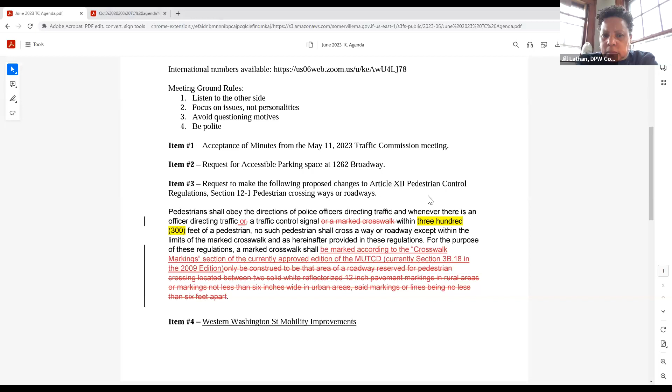Moving on to item number 3. Request to make the following proposed changes to Article 12, pedestrian control regulations, section 12-1, pedestrian crossing ways or roadways. Pedestrians shall obey the directions of police officers directing traffic, and whenever there is an officer directing traffic or a traffic control signal within 300 feet of a pedestrian, no such pedestrian shall cross a way or roadway except within the limits of the marked crosswalk. As hereafter provided, for the purposes of these regulations, a marked crosswalk shall be marked according to the crosswalk marking section of the currently approved edition of the MUTCD, currently section 3B-18 in the 2009 edition.

Who is here to discuss this item? Good evening, Commissioners. This is Brian Postlewaite, Director of the Engineering Division, representing our traffic engineer, Jessica Bello, who worked with me to develop this language based on a successful appeal conducted earlier this year. We discussed this at our last meeting, and you had requested to table it for the month, but you also requested that we develop a traffic signal plan of the city with buffer areas for 150 feet and 300 feet around each signal, which we provided earlier this week. As I recall, the main question from last week's meeting was whether we should change the 300-foot dimension to 150 feet based on requests from the public. Yes, thank you. Discussion on this item.

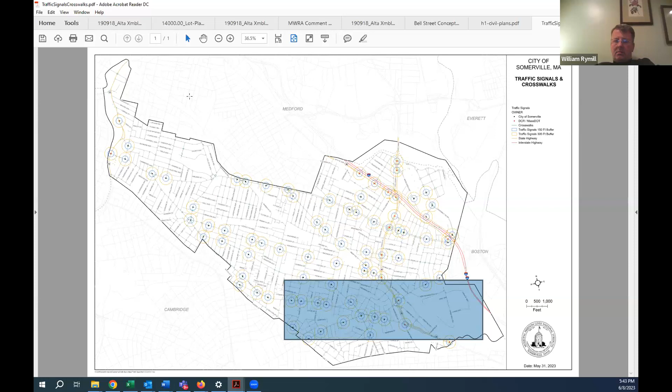Could you try Washington and New Washington? Yes. Only because in the past I've had complaints about the crosswalk area there. I am befuddled why it's not letting me just zoom in comfortably. There we go.

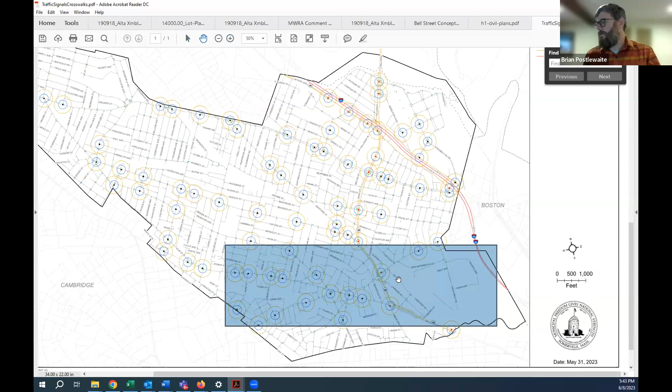So New Washington and Washington doesn't have a signal at that location. But if you were to take — this is a driveway signal for Clarendon Hills driveway, if I recall correctly — but up here where Innerbelt intersects with Washington is a traffic signal. Right, we use that as well.

As I recall the conversation last time, the question was whether 300 feet, or reducing it to 150 feet, would substantially improve or reduce the distance a pedestrian has to walk to get to a legal place to cross the street at a crosswalk, or get outside of that distance to find a safe place to cross without a crosswalk.

Our professional perspective is that 150 feet is the minimum, but that 150 feet would be an acceptable dimension. It is just greater than the standard stopping sight distance in the city, based on a 25 mile per hour speed. At a 20 mile per hour speed, it's smaller than that.

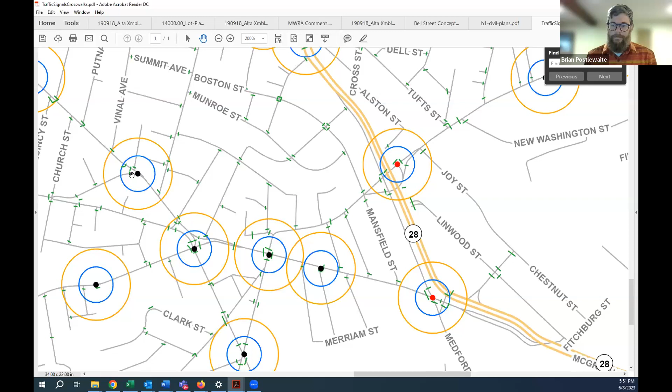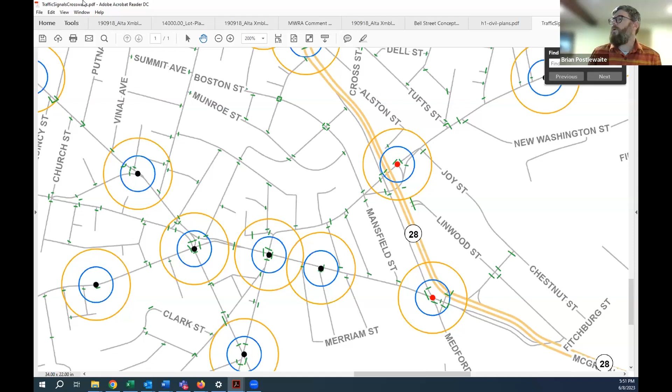Okay. I hope everybody can see that. Unfortunately, I don't know how to zoom in. Well, before I spend the time figuring out if I can zoom in, can everyone read that, or is this too small? I can see it.

So right now, this is the currently proposed language that is up for a vote. You've moved and seconded it, so you're in the discussion phase on this item. Right now it currently has 300 feet as the dimension.

Any one of you right now can vote to amend this section or any other section in this motion. You would vote on it. So the way you would change it to 150 feet is somebody would move to amend this item to be 150 feet, somebody would second it, you would vote on that amendment, and now you're voting on the amended item with 150 feet to be part of the regulations. Does that make sense, Chair?

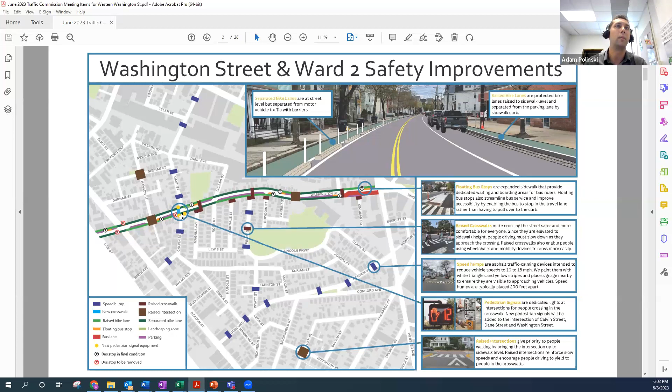I won't go into all the elements here, but at a high level we're planning on adding a number of speed humps around the neighborhood, raised crosswalks throughout the corridor along the side streets and across Washington itself, a couple of raised intersections, and starting to incorporate minor signal equipment improvements as well.

To go into the details of what we will be requesting of the commission, I have a series of slides that go through the existing condition, what we're proposing to change, what that will look like in the final condition, and our current construction plans.

For Washington Street between Line Street and Beacon Street, we currently have metered parking today at a couple places, a loading zone, and a woefully short bus stop just short of Beacon. There's currently a left turn lane and then a through lane along the curb. What we would propose are a few things.

Number one, we will have a protected bike lane here, so we will need to transition that bike lane back into the existing shared bike condition with general purpose travel. We'll be using this space across this driveway and at the end here for that, which you'll see on one of the subsequent slides.

We will request removing that one metered space here to become no parking anytime. The rest of the metered parking in front of the daycare would become loading, which we heard was more desirable for the daycare and some of the needs of these businesses. The bus stop currently in front of Wine and Cheese Cask would move far side here, improving efficiency for buses. That loading zone currently here in one metered space would become that bus stop, and the metered parking here would just shift back.

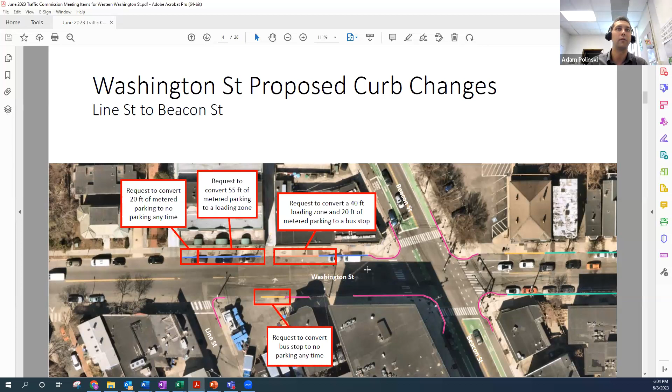We are going to move the crosswalk at Beacon a little bit closer to Beacon itself, which will allow us to still save two meters here. Then this bus stop on the south side of the street will end up moving to a different location that I'll describe on a future slide, so we would request that it be removed as well.

So in the final condition, we'll have the loading zone I described, a little section of no parking leading up to this driveway, a new bus stop, two metered parking spaces, and then no parking on the south side, which is the existing condition today, but without the bus stop.

I apologize, I don't have a better visual for you guys, but I do have the construction plans here that give you a sense of what those regulations translate into in terms of the actual final product as they stand. We're still making some tweaks, so some things may change slightly, but the general intent here will not change.

So we have the protected bike lane, which will be raised along this section coming out of the Beacon Street intersection. Right now this is one of the things that will change, which is it's showing it tapering out in the street in front of the loading zone here. We're going to request that it stays back here until this point and then transitions out.

On the other side of the street, we have the street level protected bike lane with those precast concrete curbs that I was discussing. The left turn lane and through right lane that exist today will just become one single lane, and that's how we are able to accomplish all of this here.

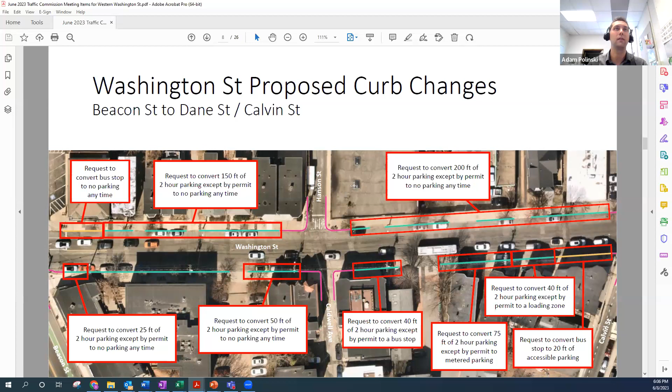I think it would be easier to just show you what the final condition will look like. But we are requesting a number of changes. These boxes will ultimately be what we're asking for in the Traffic Commission language that we submit next month. Long story short, we will need to restrict parking on the north side of the street.

We will be keeping parking on the south side, leaving the 2-hour parking that exists today in this area. We will be taking the eastbound bus stop that used to be at Calvin and at Beacon and turning it into one here. One thing we heard was that there were short-term parking needs for Shiso Kitchen, Sweet Laundry, and other businesses in the area, so accommodating those needs was something we focused on. We're taking what used to be 2-hour or permit parking, where anyone could park, and turning it into one accessible space. There's a hydrant here, so we can't allow anything at that spot, but we're having a loading zone behind it for 5 to 15 or 20 minute pickups and drop-offs, and metered parking behind that, which would be the best way to accommodate those short-term needs we'll continue to see there.

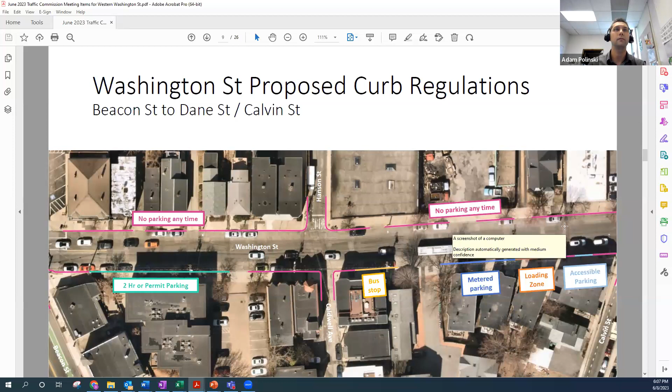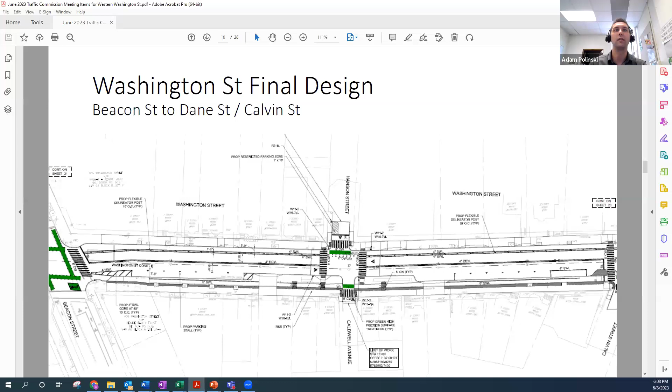In the final condition, we'll have a bike lane in the westbound direction on the north side of the street, separated with a precast concrete curb. On the eastbound side, we'll have parking floating next to a raised bike lane. We'll have a raised intersection with two new crosswalks across Washington at Hanson and Caldwell. The bus stop I just described will stop in the travel lane, allowing easy crossings to and from it. And this is where we'll have the metered parking, loading zone, and accessible parking as you're approaching Dane Street and Calvin Street.

Continuing to move eastward, Dane and Calvin are now on the left side of the screen, working your way over towards Parkdale Street. Perry Park is right here where this bus stop is located. Right now we don't have parking on the south side of the street for the first two blocks heading eastbound. The travel lanes shift over and we have 2-hour parking starting here. Going in reverse order, there's no parking up to Leland heading westbound, but we do have a couple of spaces as you're approaching Perry Park, and then a bus lane with a bus stop.

We are not proposing much in the way of curb regulation changes at this location. However, there will be some other street design changes I'll talk about in a minute. The notable change here is that we'll be removing the bus lane to create a floating in-lane bus stop. We found this bus lane wasn't particularly effective, partly because there's not as much traffic here as in other locations with bus lanes, and also because it's particularly short. We felt it was hard to justify keeping it given all the pressures on what we want to do with our curb, and felt there were better ways to get buses through here.

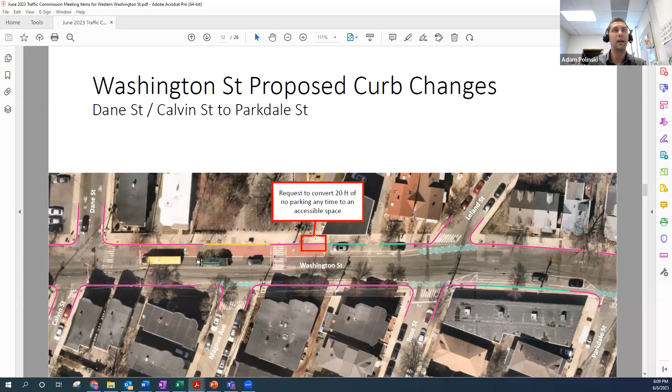So we're actually saving a little bit of space, and we'll be able to take what is currently no parking and add an accessible space, while keeping the parking that's already on this section. In the design, here's the new accessible parking space, a raised crosswalk, an in-lane floating bus stop, and instead of extending the bus lane through here, we'll create a little area for new greenery and landscaping, which residents of Washington Street and the surrounding neighborhood told us they were really interested in.

Everything else will largely function the same as it does today, but in a more permanent fashion.

Continuing down the corridor, Parkdale is now on the left, Parker Street on the right, at the bend in the roadway getting closer to the Argenziano School. Changes are more minimal here compared to the first couple sections, since a version of this already exists on the street today—we're just making it more permanent with tweaks here and there. We largely have no parking on the north side, a few spaces here, and a few spaces on the south side, plus a pair of bus stops near the eastern edge of the page.

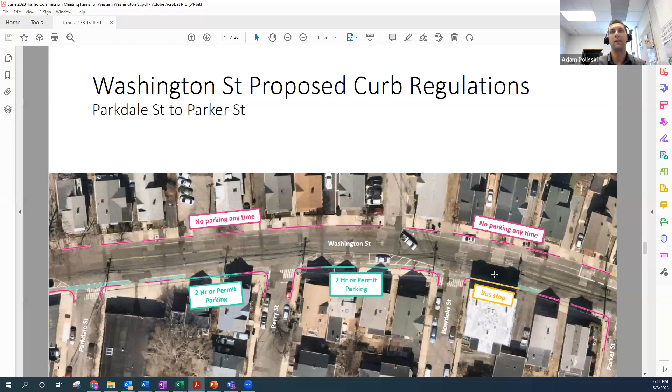The primary changes will be over here, where we'll be creating more of a transition. Because we're floating this bus stop, we won't have room for parking on the north side anymore, so we'll be requesting to restrict this parking. We're also shifting this bus stop back a little, where the travel lanes will taper over, so we won't be able to accommodate parking at this location either. The parking spaces here will remain, and we don't propose changing those regulations.

On the right side, you can see the floating bus stop here. The other floating bus stop is just off the page, but you can see how the transition eats up any space we'd otherwise use for something else. That will transition into the street-level protected bike lane. We also have a couple of raised crosswalks across the side streets and a new one at Perry Street that crosses Washington.

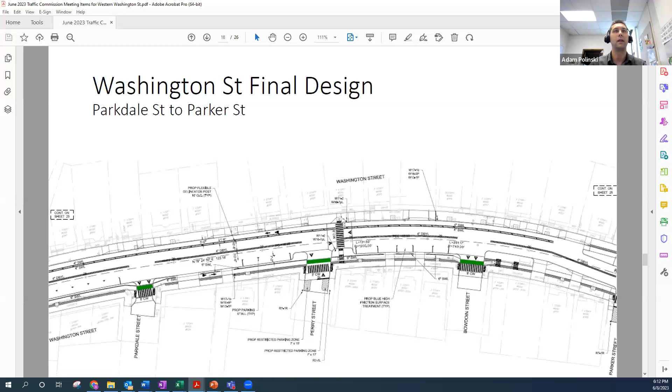Getting close to the end here. We now have Parker Street on the left, the Argenziano School and driveway on the south side of the street, with their parking lot across the street, and the Bumpus Bridge toward the right side of the page. We currently have teacher parking on the north side heading westbound, an accessible space, a couple of metered spaces by the bus stop, and no parking anywhere on the south side of this section.

We'll be making a couple of changes here. In the final condition, the bus stop will shift back a little. We'd like to swap the accessible space with the 2-hour permit parking space. And the bigger change—the biggest in this section—is that we'd like to swap the side of parking, moving away from the special permit designation we currently have.

This would still be primarily used by teachers, but by moving it to the south side of the street we actually gain something like 9 or 10—sorry, 4 or 5—additional spaces. So this increases the number of parking spaces in this section, which is something we heard was important for the Argenziano teachers, since parking availability is definitely limited as you're directly approaching the school.

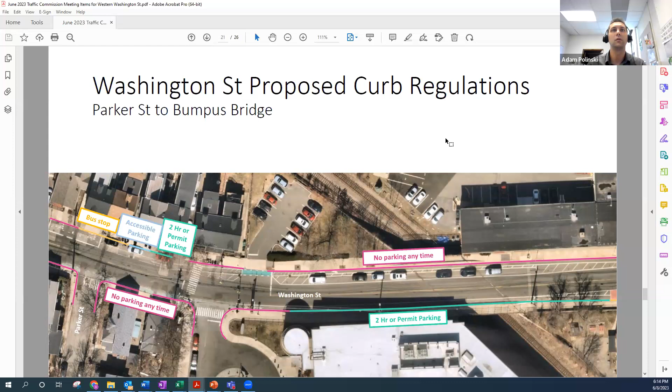Here's our current plan for the final design, where the parking would flip to the south side of the street, and we'd have the street-level protected bike lane going in the other direction. We would paint the accessible space blue, at least across the bike lane, to highlight for cyclists in particular that they're next to an accessible space and need to be paying attention.

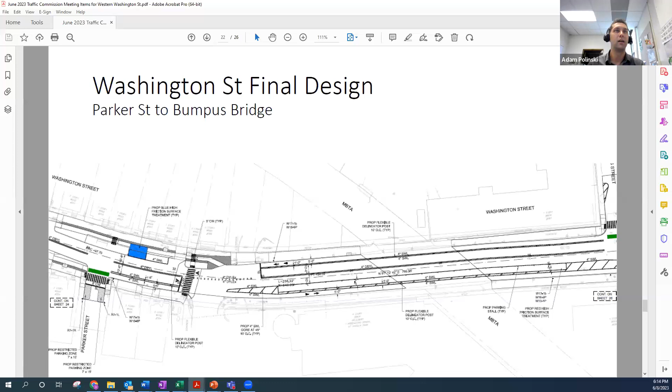That will lead into the floating bus stop here, so this will all be raised along this section. We're also planning to incorporate a new raised crosswalk for pedestrians accessing the Argenziano School—parents, teachers, students, or anyone else in the neighborhood heading to Lincoln Park.

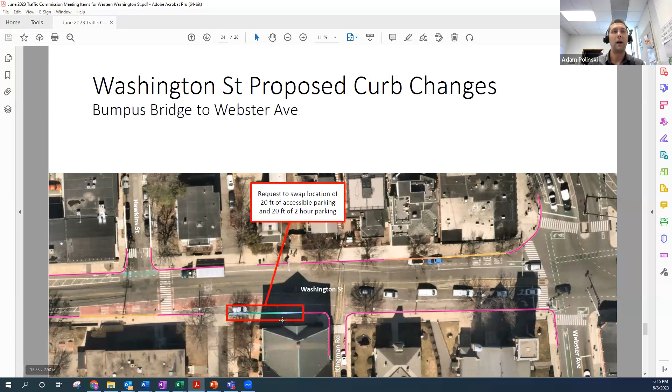And then the last section here, from Bumpus Bridge and Hawkins Street over to Union Square at Webster Ave and Somerville Ave. Again, here we've largely made the changes through the pilot that we are planning to incorporate and are not expecting to change a whole lot on this section. The only minor shift is just to swap what is currently an accessible space to 2-hour parking spaces, and then another accessible space, and just consolidate those so the accessible spaces are next to each other in one 40-foot zone, and then shift the 2-hour parking up to the end of this block.

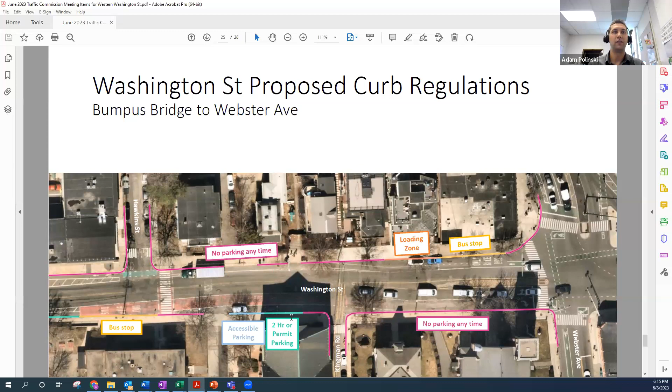And then in terms of the design, we will plan to keep the bus bike lane that continues into the square. The bus stop on the other side will again be floating, as is every other bus stop on the corridor. We'll maintain the loading zone in front of that, and then we'll have a raised crosswalk and an option for people to connect up to Hawkins Street, which we would like to designate as a neighborway in the future to make a safer connection for bicyclists and pedestrians who want to skirt around the square.

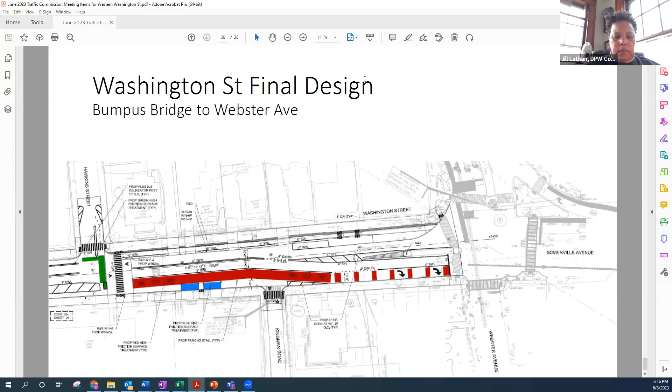I do not have anything else for the commission at this time, but happy to answer any questions. Further discussion? I have a quick question — can you go to the intersection of Beacon and...

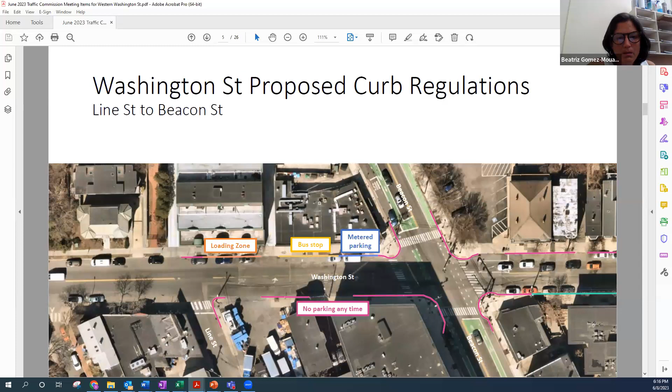Can you go to the construction document? Can you show me where the bus stop is? The bus stop is right here. So is the bus discharging into a bike lane? This right here is essentially an 8-foot wide concrete pad where people can get on and off the bus. Okay, I thought the bus went into the lane. No, that's the whole point, just to separate those — MBTA isn't allowing that anymore. I thought I saw that. You're correct. Okay, so all along there — that was my only question, and I'm glad to see the concrete curbs.

I bet Commissioner Lathan is happy with that, because we lose so many white posts. One of these days it's going to become like the enigma of the turf fields with the black rubber — somebody's going to accuse us of dumping myriads of PVC and sending it off who knows where. So I much prefer the concrete curbs, even over protecting the white poles, because it's becoming a bit of a nuisance, if I must say.

All right, that was my only question. And perhaps a second question — I'm assuming through the councilor for this ward, residents have been informed, they know of these changes.

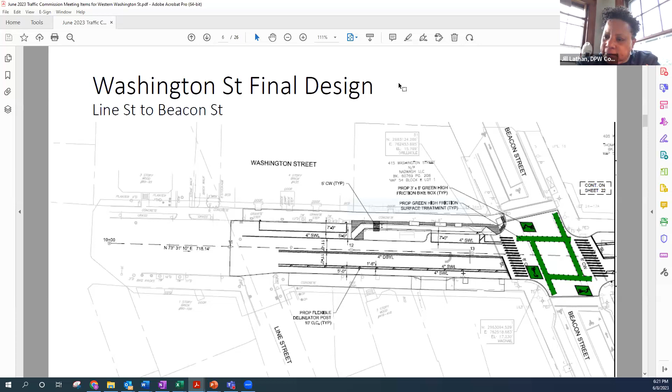Thank you. Anything else from the committee? I know Councilor Gomez-Mouawad, you have other things to attend to this evening. I do, but I'm in chambers, so as you can probably tell, I'm in a little corner here.

I see that. Commissioner, I just want to flag that this wasn't on the agenda as an item for discussion, it was an item for vote. So we would have to vote, or there would have to be a motion to table this item to a future meeting or next month, whatever the commissioners would like to propose. Can I get a motion to table this item, or not table it, to give Adam and his team mobility more opportunities to tease this out further and come back before us with an actual request?

Through the chair, could I ask one question about that? Because I will need to change some of the language and add additional items to this, so I don't know if you would need to reject this rather than table it. I just want to bring that up in terms of logistics, because I would kind of prefer to scrap what I submitted to you guys this month and come with a fresh, new, clean slate of items. I don't know what the logistics would mean, but from my perspective I think that would be easiest. Okay, Laura, you were going to say something?

Yeah, as a newer secretary to the group, I was going to ask Laura if she thought that was the right course of action here, rather than tabling, to vote to reject. Yes, either way is fine, Jackie.